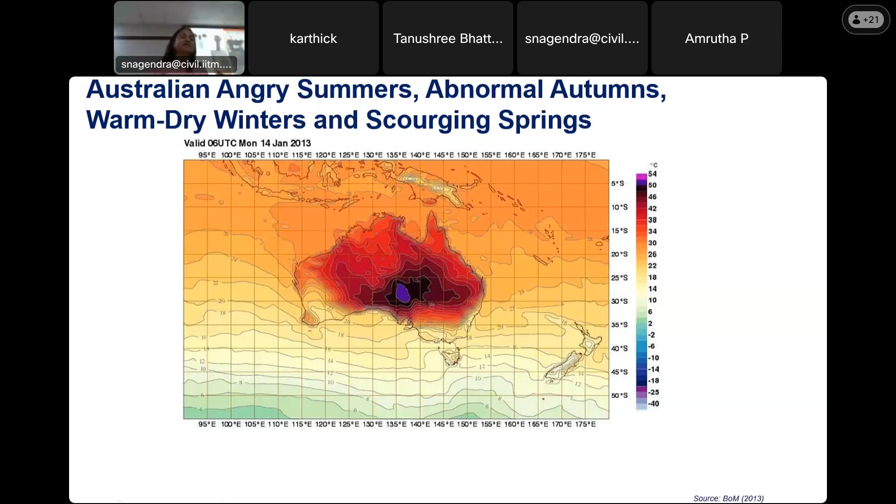So what we are trying to do is design some instrumentation, keeping all those ideas in mind - that it can't be too expensive, but at the same time, how do you calibrate and validate the measurements coming from a low-cost sensor, so we have some kind of confidence to say the data is okay, or even if it's not okay, what is the error band, what is the sensitivity of the temperature you are measuring.

And we created something like a shield so that the sensor itself doesn't get heated up by the temperature, and also to make sure there is enough ventilation so it's not impacting the readings.

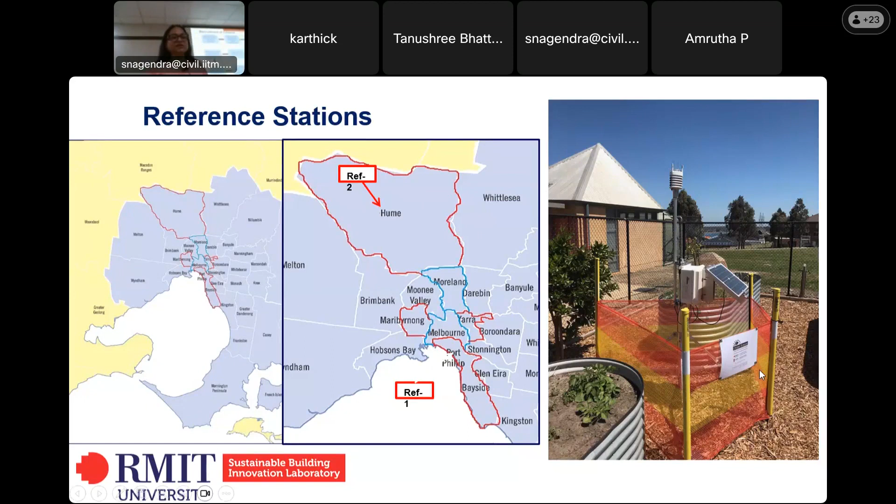So we had to go through the whole process of ethics application, and we partnered with 22 local councils in this project all over Australia. Most of them, some 7 to 8, were from Victoria, where Melbourne is, and some from New South Wales, which is Sydney, also shown on the map.

It was very, very important that we engage the citizens. If we just send an email to people, nobody is going to respond. So we first had to create a website, then publicize it through lots of meetings and discussions with council people. Some of them may not even respond, while others respond because it happened to align with their strategic priority at that particular time of year.

Then we have meetings with them, and identify certain areas of strategic importance to the council. We use their communication channels, because each council has a newsletter, a social media platform, and community groups. We used all kinds of communication channels, getting them to publicize through their network, and that got some enthusiastic people engaged.

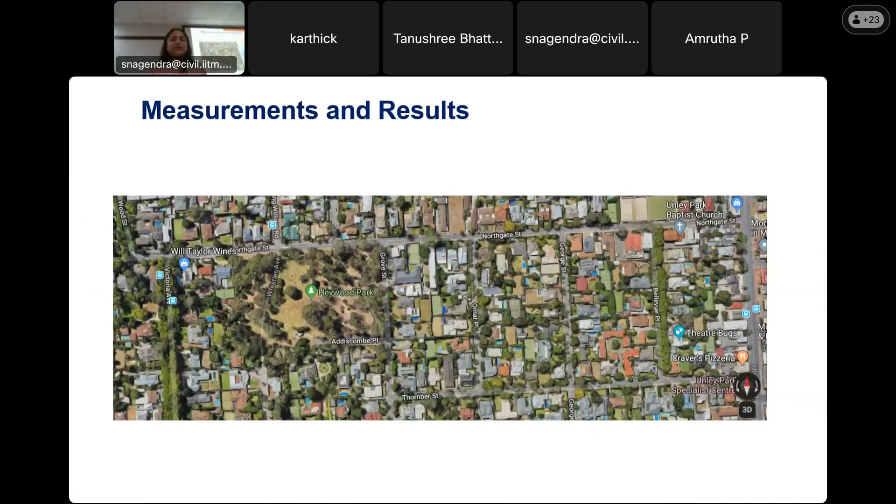If you have air conditioning taking air from that particular area, the energy consumption depends very much on where the fresh air inlet is. If you estimate energy consumption based on the Bureau of Meteorology, you are under-predicting energy consumption. So this kind of data is very important to accurately predict the temperature.

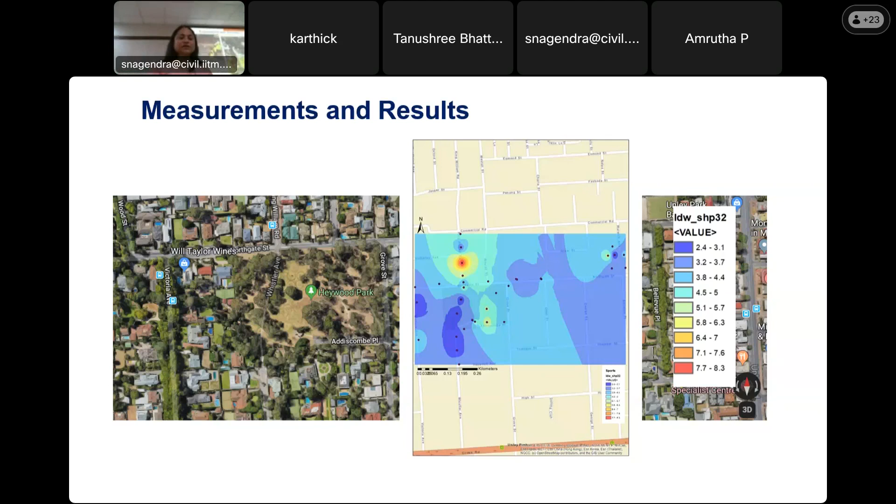Nowadays there are a lot of examples of people completely taking out natural grass and using artificial grass in the vicinity, mainly because it's very difficult to maintain - you have to do it every month. But our experiments show that artificial grass on a hot day can go up to 70 degrees Celsius.

This can be really, really dangerous sometimes for small babies. Also some playgrounds using synthetic rubber were also very, very hot during the hot days. There were similar engagements we won't go into details on.

We also created a thermal comfort tool with the measurements. People can use our website to input all the data they've measured, and find out the comfort indexes, using a universal thermal climate index with a physiological temperature model to predict whether it is extremely high heat stress, something moderate, or dangerous.

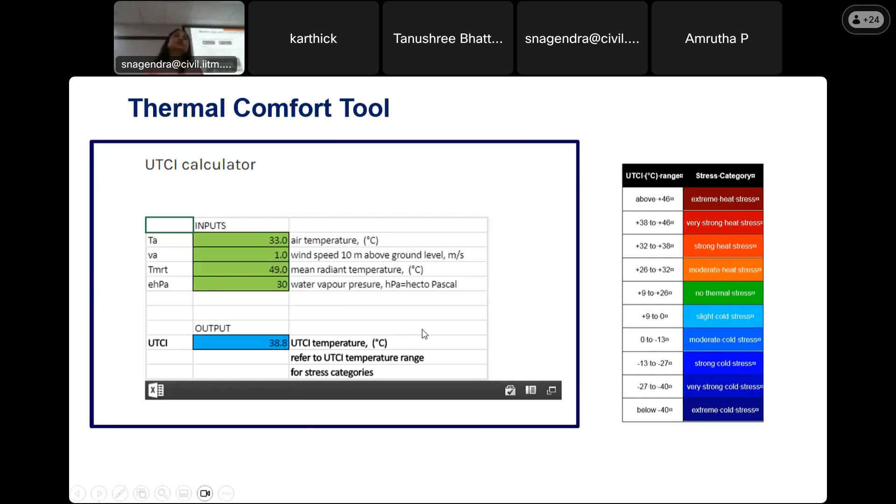What people have to do is install the app, put this equipment next to the phone, and start an experiment which could be 1, 2, or up to 3 days. Then you can take your phone anywhere, come back, connect it again, and get half-hour temperature and humidity data for the last 24 hours.

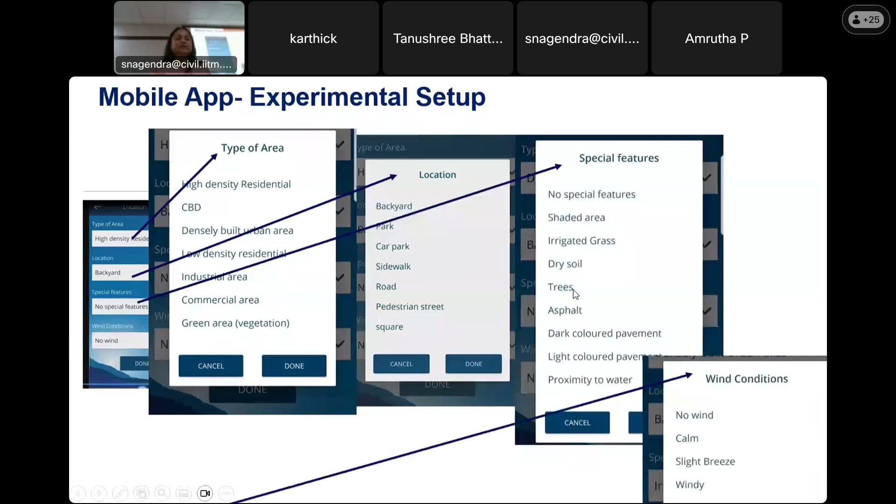After starting the equipment, in the app you can input information like what kind of area it is, what kind of location, any special features impacting the climate, and wind conditions. Once you collect that data, you pick a nearby Bureau of Meteorology station - for example near Sydney or Melbourne - and then you can plot the temperatures.

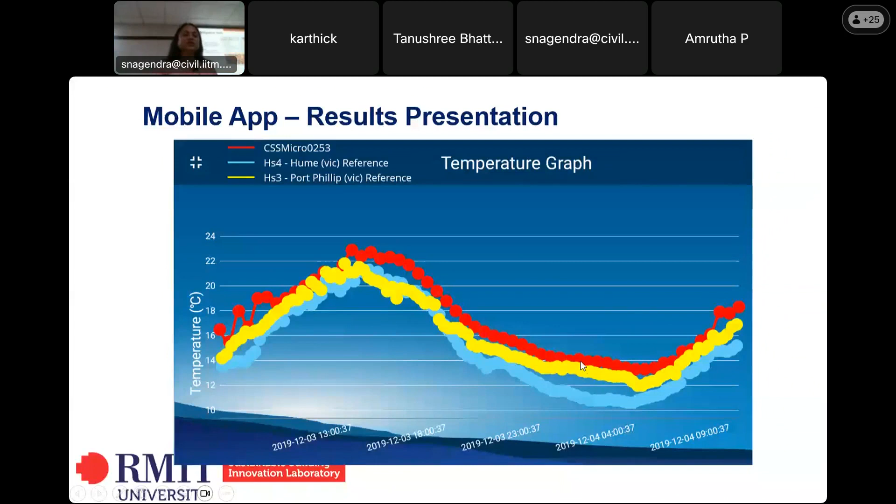We have also developed a mitigation tool for different councils. What I've shown is just for one particular small area. So if a council wants to see, for Sydney, what kind of mitigation strategies are good for that particular climate, whether it's about using water features, or trees, or cool materials, they can input that and get a broader view of how much cooling is going to happen from that particular mitigation strategy.

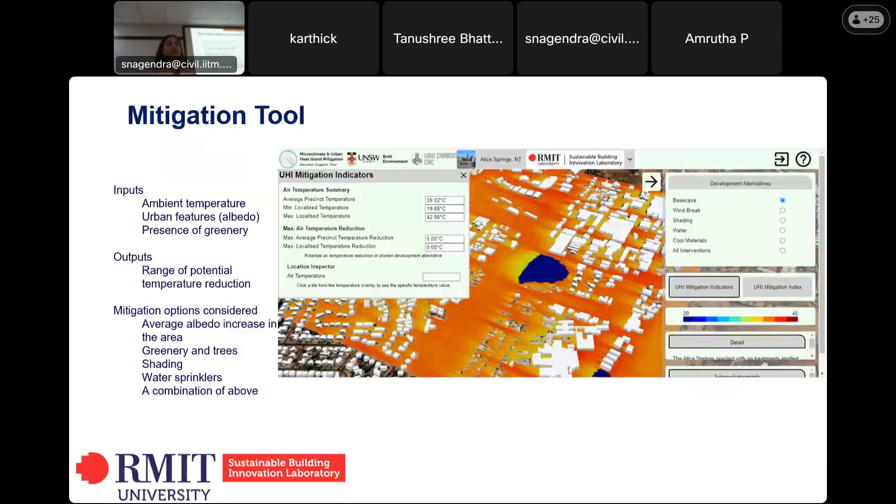So I was trying to think about how do you translate that into the Indian condition, and what I've seen over the last 20 years is that nobody could afford an air conditioner many years ago, but now it's become as normal as an electric bulb or a ceiling fan.

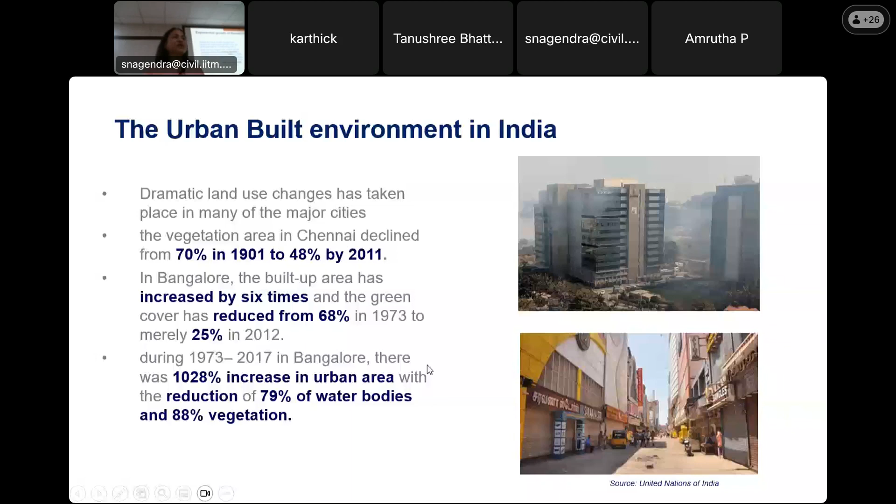One is causing the other, and it just keeps building. If we don't act proactively, in the future the electricity supply will not be able to address the demand. The cooling demand is predicted to increase 750% by 2050, and if we're still going for traditional power, 300 new coal-fired plants is what would be required.

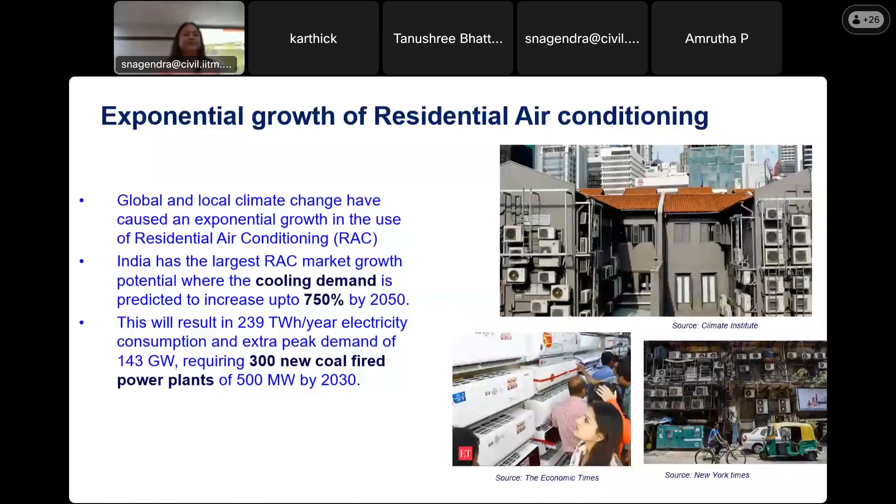I just want to, I don't know how we are going on time, so I'll talk about the indoor air quality project we've been working on in the last few years. This was a project funded by the State Government of Victoria, looking into how you improve the indoor air quality for vulnerable populations.

When you talk about vulnerable populations, you're looking at people in two different age spectrums: people who are really old and people who are young. If you look at young people, they are still developing their respiratory capacity, and whatever happens in the early stages of their life is going to have a long-term impact on respiratory diseases and other kinds of diseases.

If you look at schools here in Australia, in most schools, when I was young, they were all naturally ventilated, and I don't know whether things have changed—maybe there are different types of schools now. So looking at the air quality issues in the project we have here...

The outdoor air quality is quite good in Australia most of the time, but there are occasions when there's a bushfire in a nearby forest, and through the wind force, areas like Melbourne and Sydney can really be impacted by the smoke. So there are a few times a year when these extreme events happen, and that's when everybody thinks about indoor air quality, not just air quality.

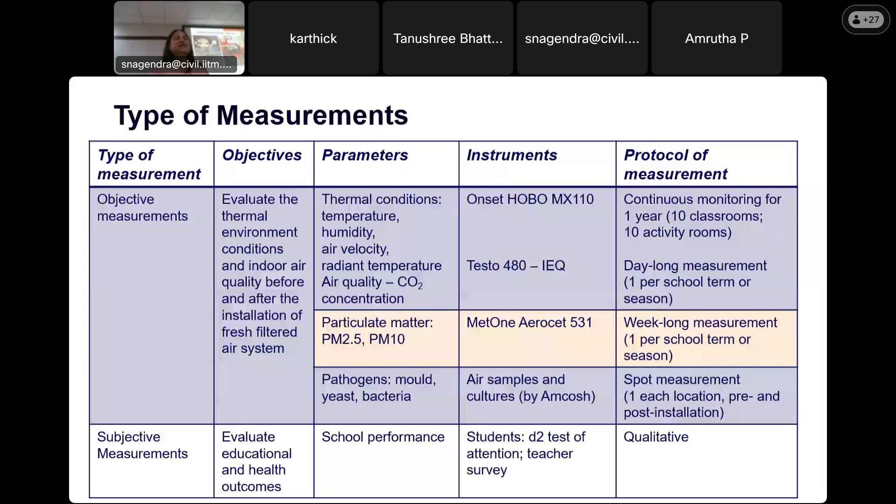So we spent a lot of time getting permission from the schools, and we had to make sure the principals were interested. At the same time, the school teachers needed to be interested too, and we made sure it wasn't disturbing their classroom attendance.

So we have some kind of monitors installed on the wall, and also some kind of big equipment installed in between the classrooms, and also external measurement for particles too.

So this is the view of the schools there - it's basically completely closed, and some of them are double story with a corridor and two sides of classrooms.

This is a view of how the aged care centers look like, and they are more vulnerable than school children, because some of them are really not capable of expressing themselves. Sometimes when we talked to them and did a survey asking how they feel, they were really scared. They'd say it's all good, I'm so happy here, because they're thinking that if they complain, they will be kicked out of the place. So it was very difficult.

We decided there's no point asking them about their perception of air quality, because it's not going to be accurate. So we tried to get hospitalization data, but that needs very long-term monitoring, it can't just be one-off. So we learned a lot, even though we weren't completely satisfied with the work.

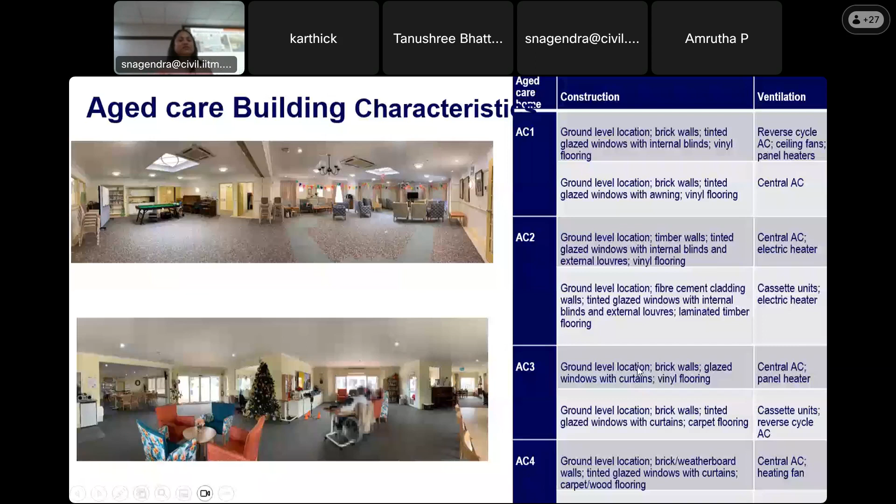We tried to do measurements for 6 months of the whole year, the first 6 months without doing any intervention. The idea is to actually install a fresh filtered air system in the ceiling, or sometimes outside depending on the design, and see how this system improves ventilation in the classroom, then collect data after 6 months.

This is the small equipment. Doing this project, we found out we didn't really develop this in-house, we just used an already developed system. We found many manufacturers probably claim their system can address the issue, but some of them aren't really up to standard.

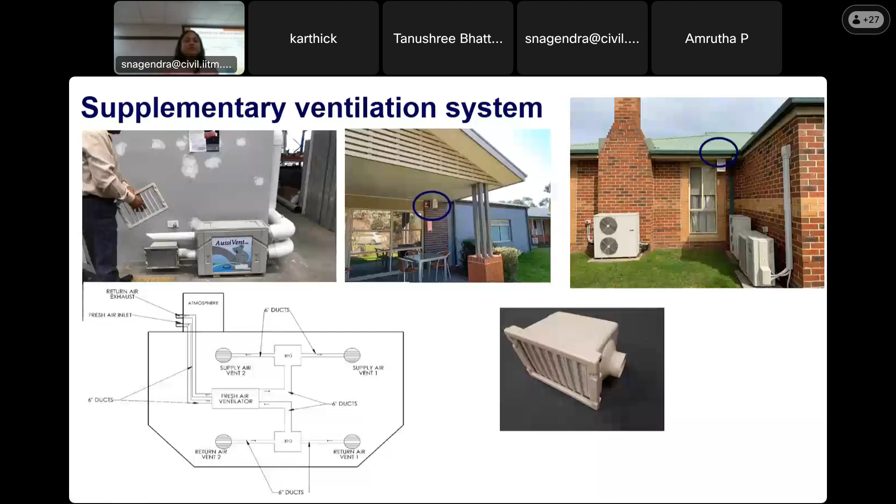For indoor air quality, people normally use carbon dioxide concentration as a surrogate, because it's a tracer gas and very easy to measure. But carbon dioxide itself is not a pollutant, it just gives you an indication of ventilation in the classroom. So even if it's really low, there could be other pollutants. Just using carbon dioxide as a pollutant indicator is not really the right way to do it.

During COVID time, this became like a Bible for most people. People were using any reading, if you see 800 ppm, people start getting really alarmed and leave the place. So it's basically about really understanding what that 800 means.

800 means basically the difference between outdoor and indoor. Previously outside carbon dioxide concentration was around 350, but in the last few decades it's gone to more than 400. So it's basically the difference between indoor and outdoor. Anything more than 1000 means low air quality or low ventilation rates, and there are standards from ASHRAE for that.

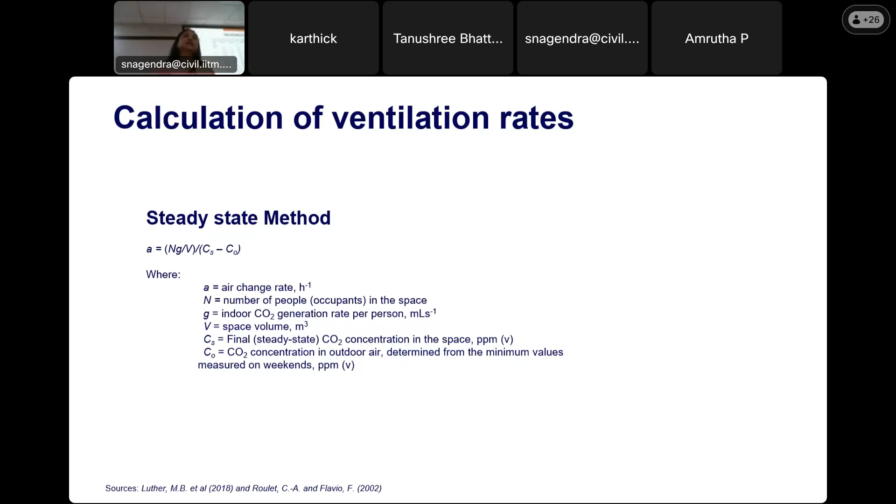We tried to calculate ventilation rates using the normal steady state method, but the interesting part was we don't really have such high airflow, and you can't really use the steady state method if you don't have high airflow, but it was still the only option for us. The standards say 10 to 12 liters per second ventilation for schools, and we found 7 out of 10 classrooms had ventilation rates below standards.

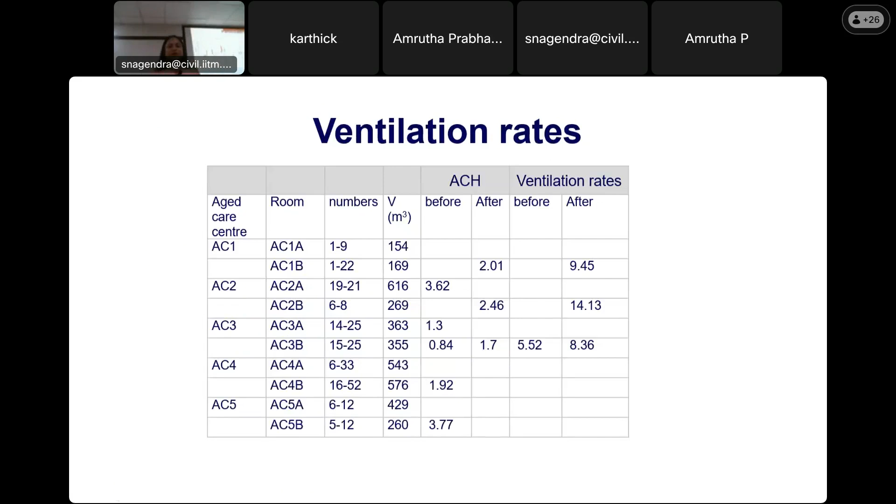We also looked at particulate matter in the classroom, and found a relation with the activity of the school children - if it's a carpentry school, when people move, the dust level really goes up. We couldn't really do controlled experiments to eliminate most of the variables.

Particulate matter was above or below standard requirements in different cases. Again, there are different air quality standards, but no standards for indoor air quality guidelines specifically - so we always use outdoor air quality as a guideline for indoor air quality.

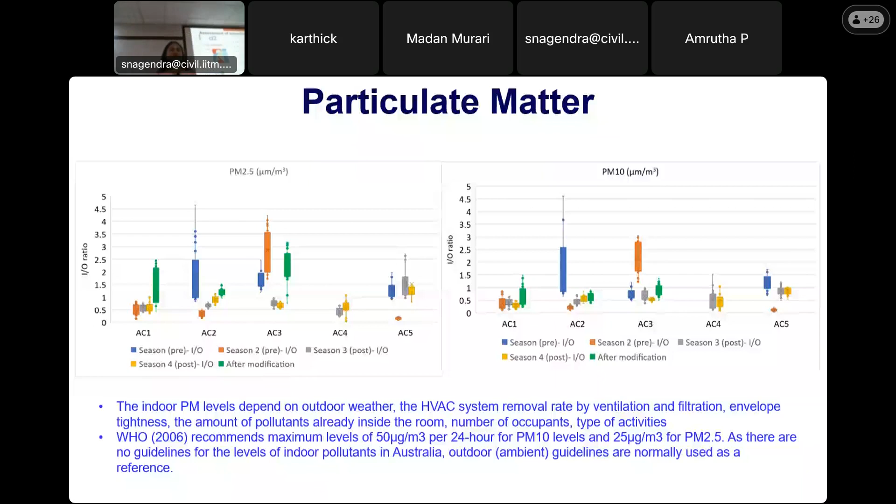So this was an interesting thing. How do you actually measure the students' performance in the classroom? One way to do that is their academic performance, right? But there are so many things affecting their academic performance, not just air quality. Probably some of them are inherently smart, or they come from different socioeconomic conditions.

So we try to do a D2 attention test, which is basically giving them a sheet where you have P's and D's and so many ticks, and then asking them to cross out a particular letter which has got two lines at the bottom, or one line on top and one line at the bottom. So it's really measuring the attention span.

So we give it to them and ask them to do that within a few seconds, and then collect that data and administer that in the classroom, and see what kind of errors they make, and do a lot of statistical analysis to see how many errors they are making in that exercise. And there are equations to measure concentration performance from these values.

And we found that there are certain parameters, for example relative humidity and mean radiant temperature, which is basically the temperature radiating from the envelope, and also PM2.5, which has got some kind of a predictive influence on the performance of the students. Not much of the carbon dioxide concentration level.

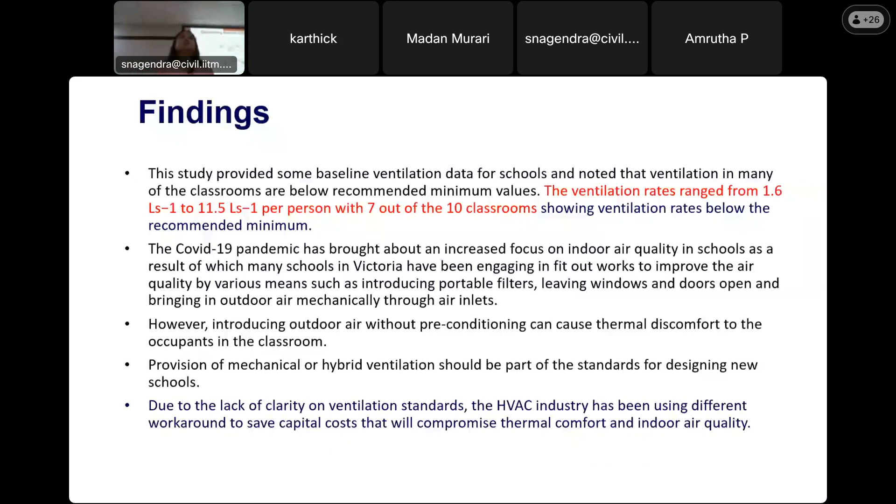And we tried to do this study - it found that you can't rely on natural ventilation anymore, and the mechanical ventilation should have ventilation in addition to heating and cooling. And we tried to figure out how do you actually optimize the cooling, the ventilation, and thermal comfort for the people.

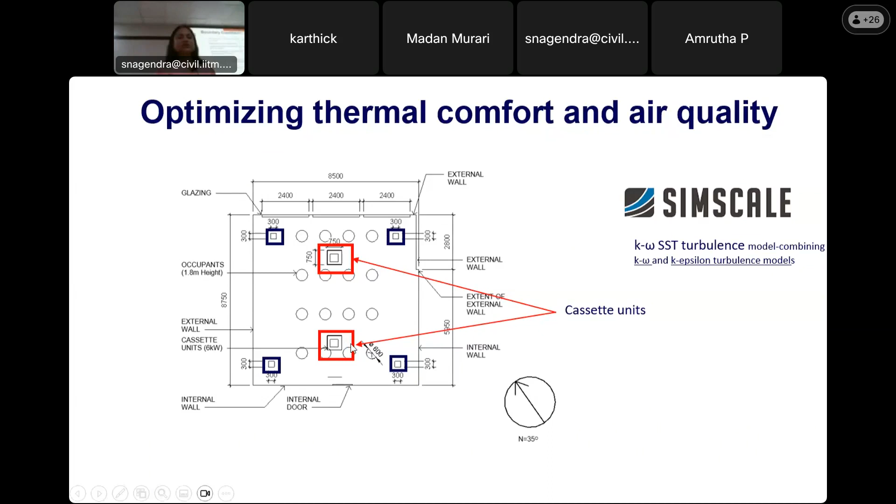This is a study using computational fluid dynamics, trying to see different ways of how you actually put your air inlet and how you put your air outlet, and how you make sure people sitting in this area are comfortable. This shows the student locations, and this shows the ventilation system, and these are the inlets. And we tried to model actual conditions in the classroom.

How do you address what kind of equipment they are using in the classroom, and how can it address peak summer, peak winter? Most of the summer is not much of an issue because the schools are closed for summer holidays, but it is the winter period - if you look at Australia in the southern hemisphere, it is summer out there now, and June, July is the winter period.

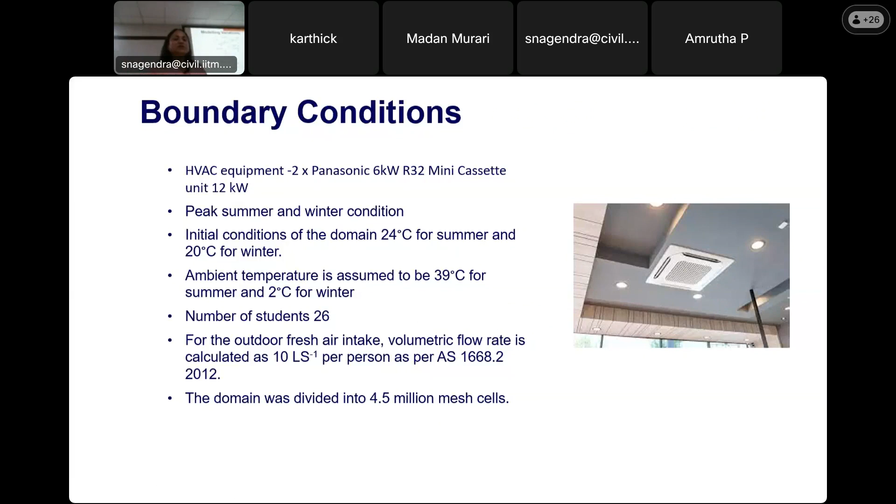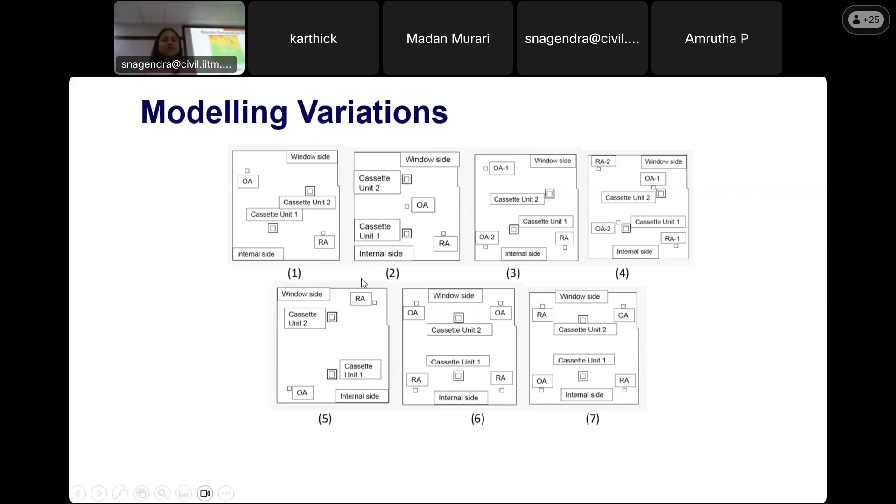And we tried to model various scenarios, looking into the outlet location, the inlet location, and also trying to put 2 outlets instead of 1 outlet, and 2 inlets, things like that. And then trying to see the temperature variations in summer and winter.

And what we found is winter is very bad, summer is okay - you only have some issues near the envelope where they're using single glazing for the windows. So summer is a bit of an issue only in that area, but not elsewhere. Whereas winter temperature can be very bad - you're getting around 17 degrees Celsius, which is quite cold for kids. And we tried to do a predicted mean vote, which is an indicator for thermal comfort.

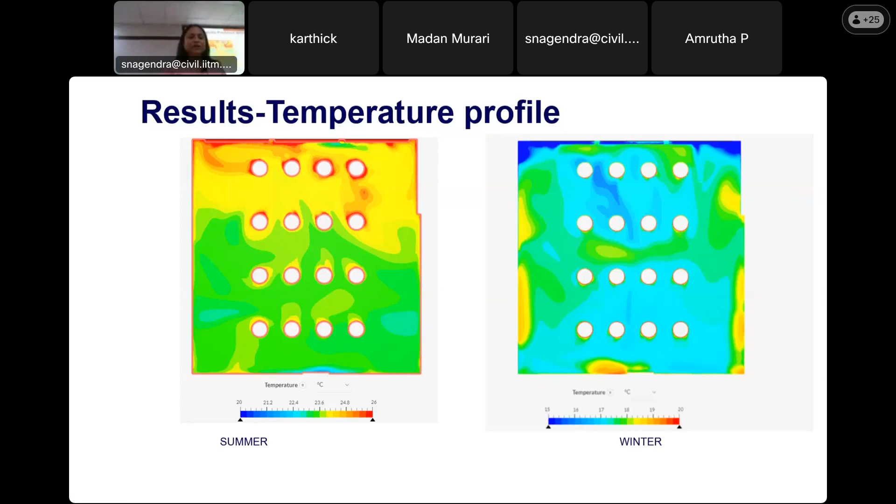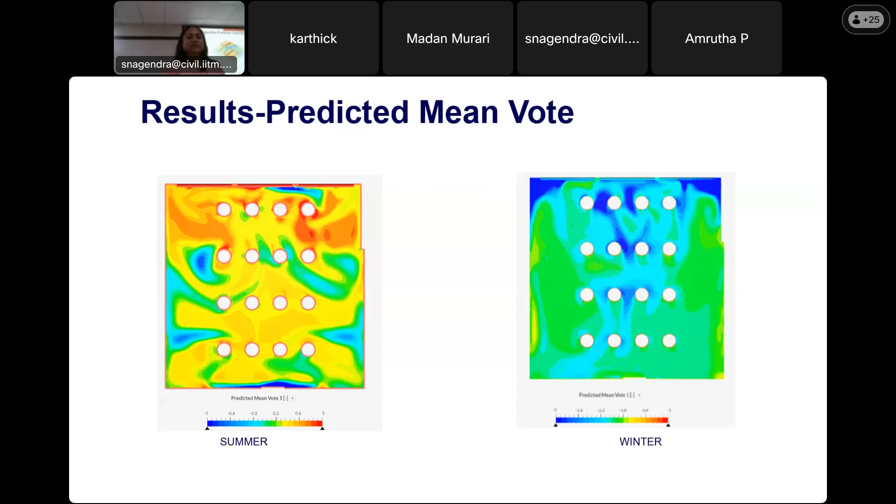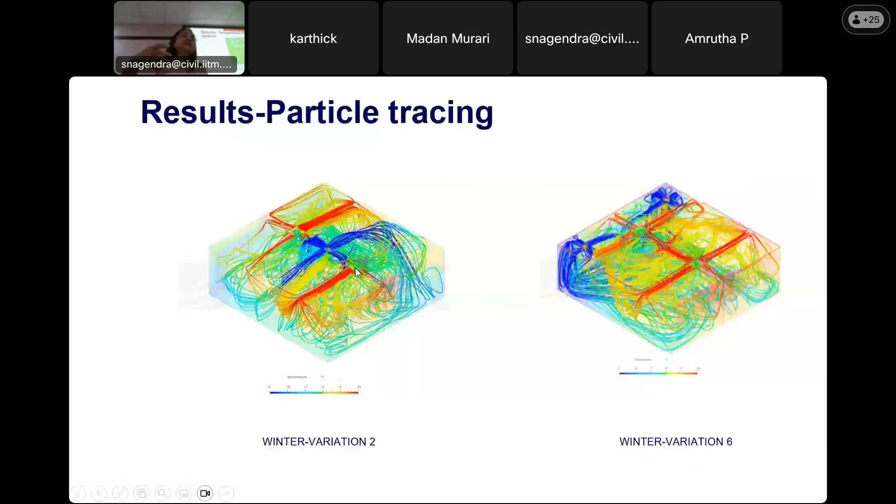We also try to do the particle tracing and see how the air is actually flowing inside, and different variations. One of the potential issues is condensation, when you have cold and hot air actually touching each other very immediately, that can cause condensation issues. So we thought some of those scenarios' performance is not that great, so we could not use those kind of scenarios. And then the result was basically, the ideal thing would be using preheating the air coming inside rather than just getting the cool air ventilation coming inside for fresh air.

So basically, we were trying to open up certain places for the air to come in, but the schools don't really have the budget to pay for the air conditioning or heating bills. So they were trying to do a very low cost kind of system. So finally, do a bit of preheating before coming inside. That was one of the solutions from this CFD simulation.

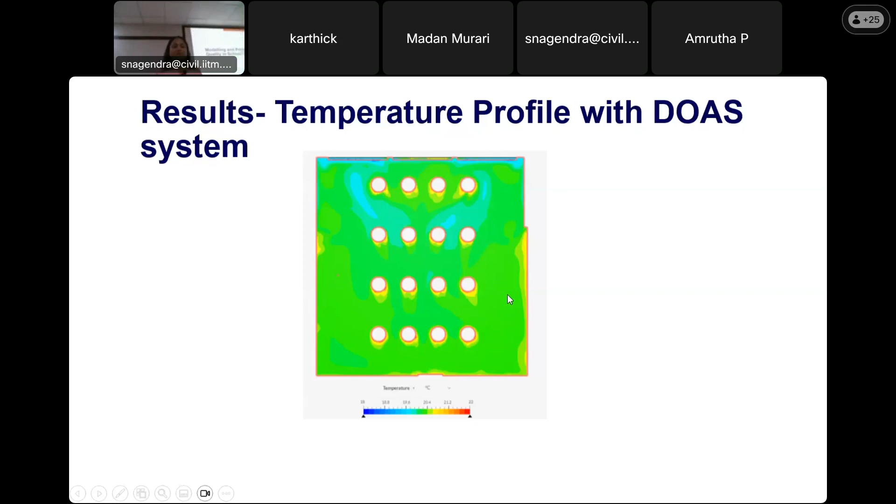And we have a new PhD student actually looking into this, because if you want to really do simulation for CFD, it takes - how many of you have done any familiar with CFD simulation - but it can be very time consuming. And how many scenarios you will create, this one study only did 7 scenarios, but you need multiple number of scenarios to come up to a conclusion.

So the modeling work, the two ways of modeling is, one is physical modeling and the statistical modeling. Physical modeling is what I have just explained. And the statistical modeling using the machine learning algorithm is what the study is going to be.

For that, there are so many indoor air quality parameters. You can look at particles, you can look at gases, you can look at other things. But what is the most important or most representative of the air quality component in terms of schools? There are a lot of pollutants actually being created inside the classroom, from students and also from teaching activities, the chalk or the coloring, those paints, things like that, creating even VOC.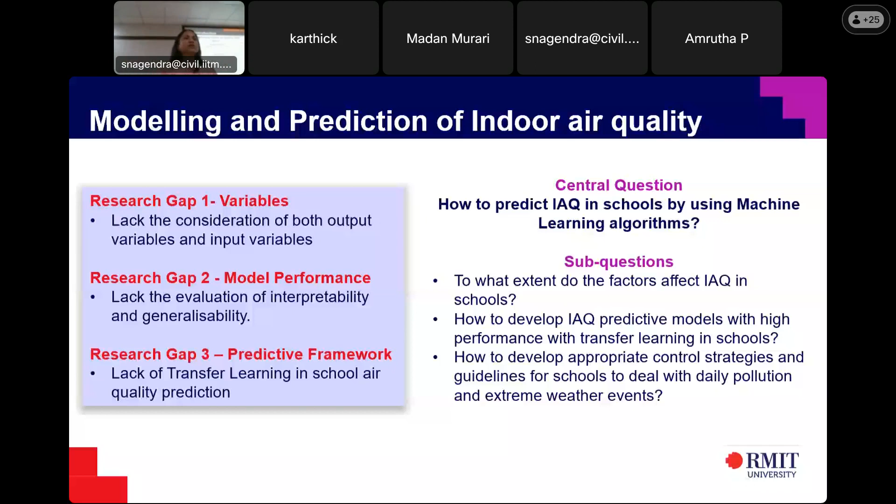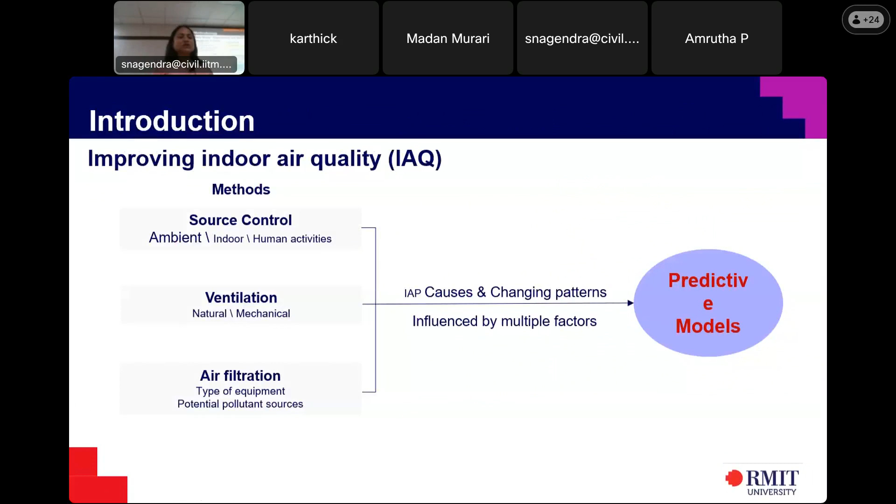So the methods for improving indoor air quality, either you control the sources or you do natural ventilation or you use filtration. And the predictive model can actually look at each of them and create some specific customized scenarios, interventions depending on the schools. So the idea is to look and focus on different kinds of locations, the area next to traffic and industrial areas, and also the area which is affected by wood smoke, and that is only happening mainly in some of the regions.

People during the winter time using wood to create heat, and that can create a bit of air quality issues during that time. We also want to focus on the extreme cases like bushfire smoke, but you can't really hope for such incidents within the PhD period. We don't really want to hope for that, but so we're trying to focus on wood smoke areas at that time, and also a normal suburban area, a normal school without any pollutants.

And trying to still work on what would be the best indicator, or can you just create an air quality index for schools using selected pollutants. And if you have a limited number of equipment, what should you measure? Because measuring gases can be quite time consuming, and schools don't really have the capacity, and we can't be going around measuring all those schools. So how do you actually select the representative schools is a problem.

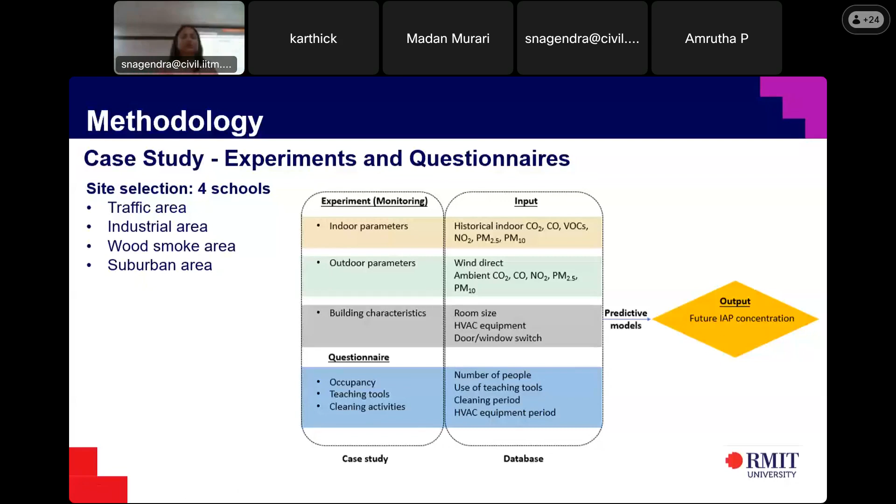So the studies just started, looking into all seasons, what happens in summer, winter, spring, where the air quality can be a big issue, and traffic areas, and then how do you actually develop those evaluation scenarios? That's what we are going to do.